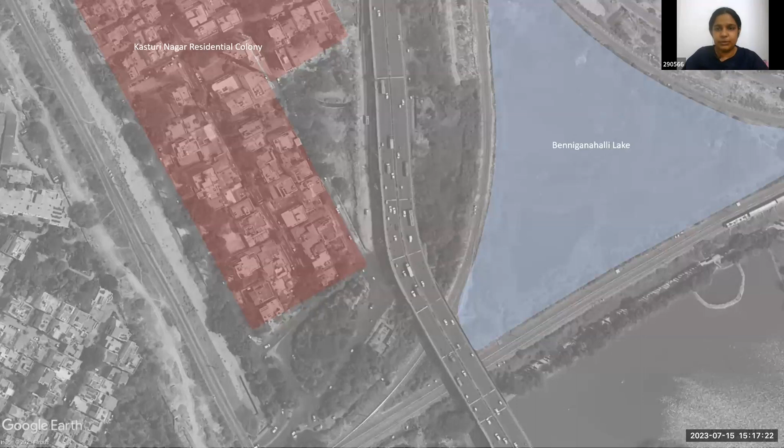Kasturi Nagar, an affluent residential neighborhood, landlocked between a flyover, multiple railway tracks, and a large lake.

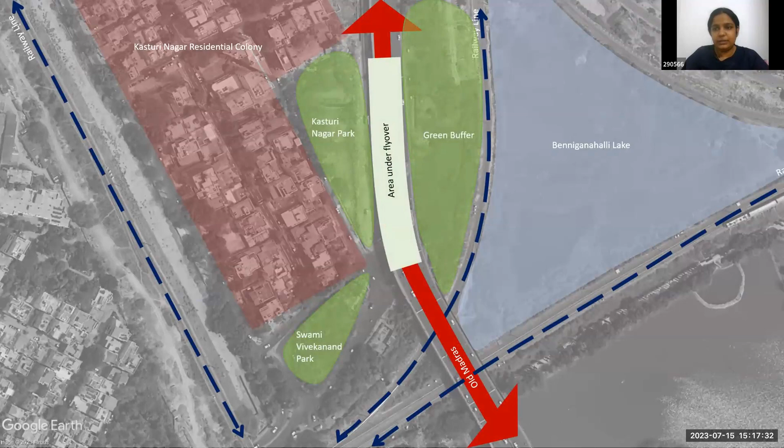It is surrounded by multiple open spaces lying dormant, like the Kasturi Nagar Park, the area under the flyover, a large green railway buffer, and Swami Vivekanand Park.

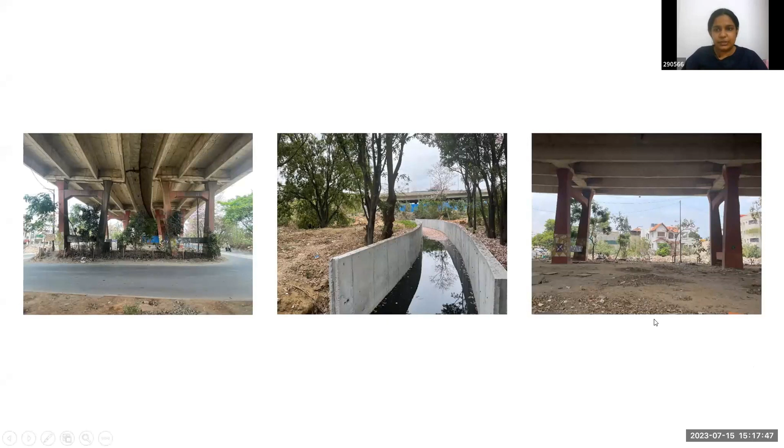However, despite so many open public spaces, there seems to be missing public life. This could be attributed to the spaces being unhygienic due to extensive garbage dumping, unsafe because of fast and disorderly traffic, missing crosswalks and footpaths, and lighting.

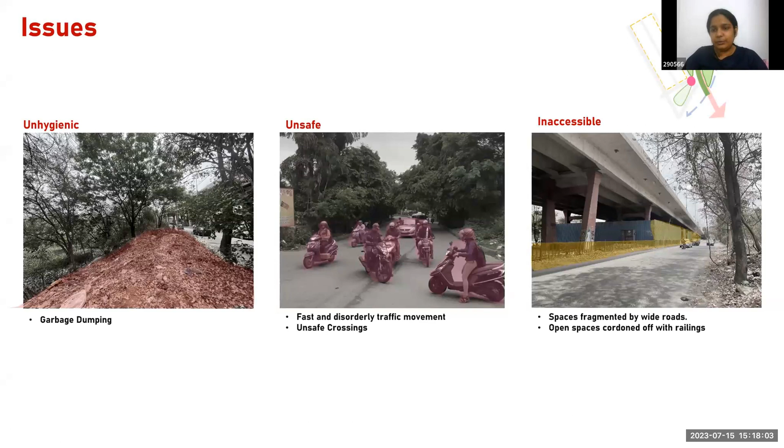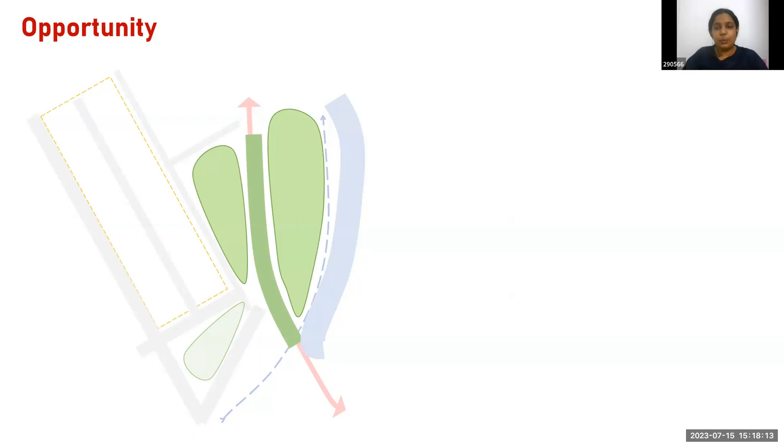These spaces are also inaccessible as they have been barricaded and due to the wild growth of plants along the edges. Yet, the site comprising Kasturi Nagar Park and the area surrounding it is brimming with the possibility of becoming one seamless large open space.

There is an opportunity to rethink and redesign the pedestrian movement for better connectivity. The abundance of natural wealth can be banked upon to create a sensory experience.

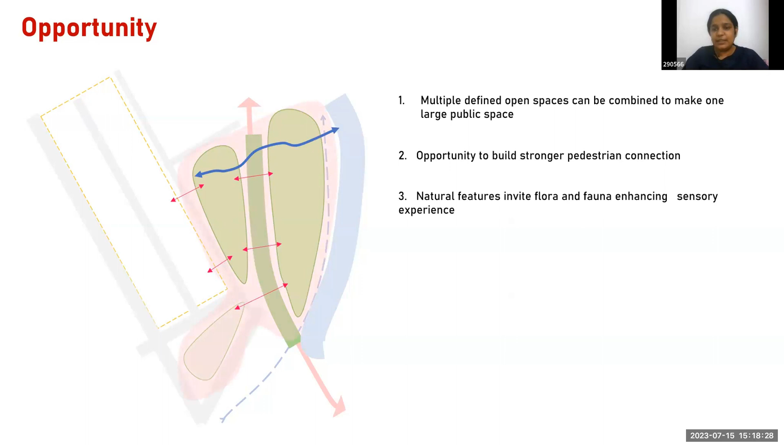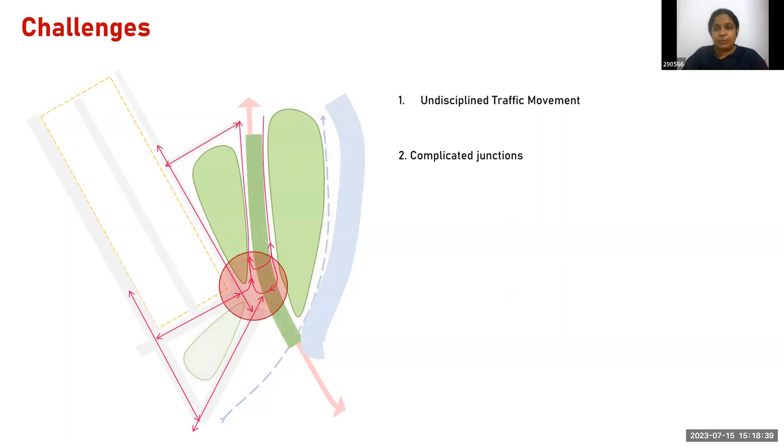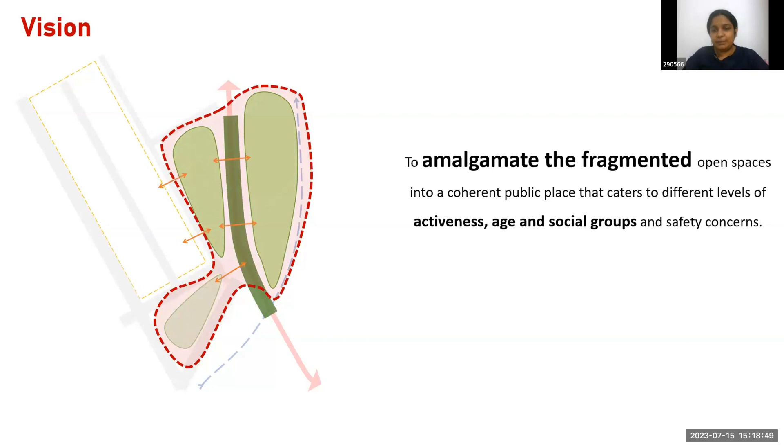Having the sites brimming with flora and fauna, however, harnessing these trends, redirecting the scattered movement of traffic and resolving the unsafe and complicated junction poses a challenge. Thus, the project Urban Rehash aims to amalgamate the fragmented open spaces into a coherent public place that caters to different levels of activeness, age, social groups, and safety concerns.

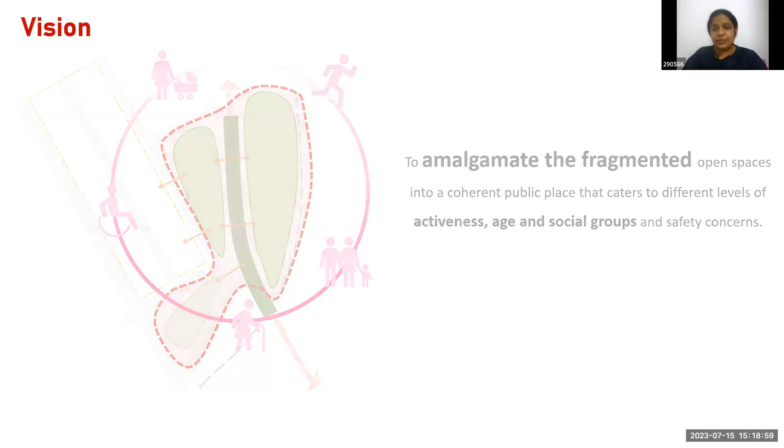To engage the diverse population and cater to their varied needs, the design identifies three larger zones. The Kasturi Nagar Park, imagined as the daily use leisure space for adjacent neighborhoods, caters to various age and social groups, and serves as a gateway for locals seeking relaxation.

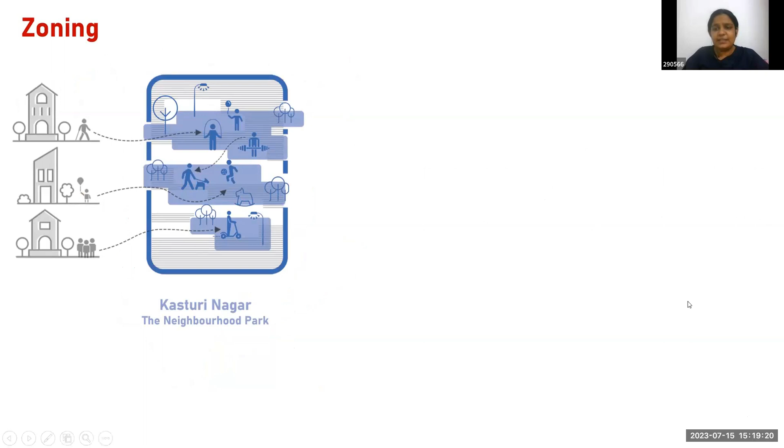The area under the flyover is designed as a district-level active public space to attract youth with opportunities to play, eat, and socialize in a safe and well-lit environment.

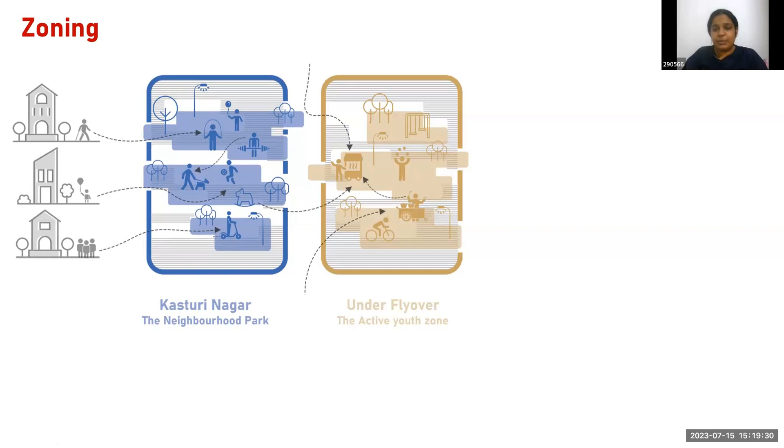And the lush green buffer will be the city-level public space, transformed into a picnic spot with lush greenery, cool breezes, and beautiful plants, birds, and insects benefiting from its proximity to the lake.

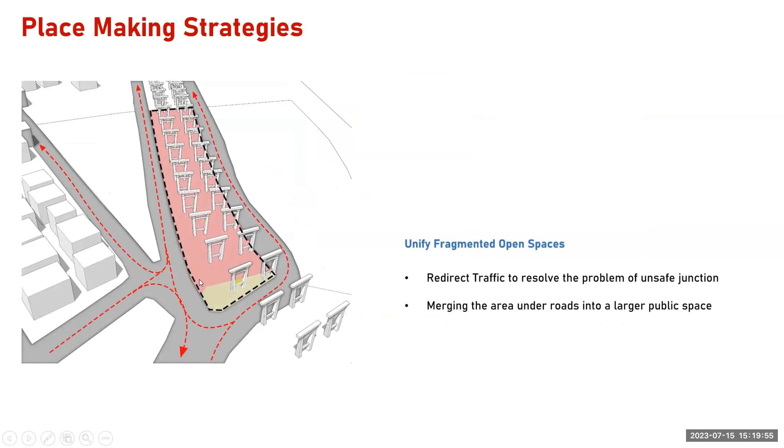Coming to the placemaking strategies, to resolve the problem of the unsafe junction here, the traffic is being rerouted so that we can provide a signal control junction here, while using this whole space as a single public space.

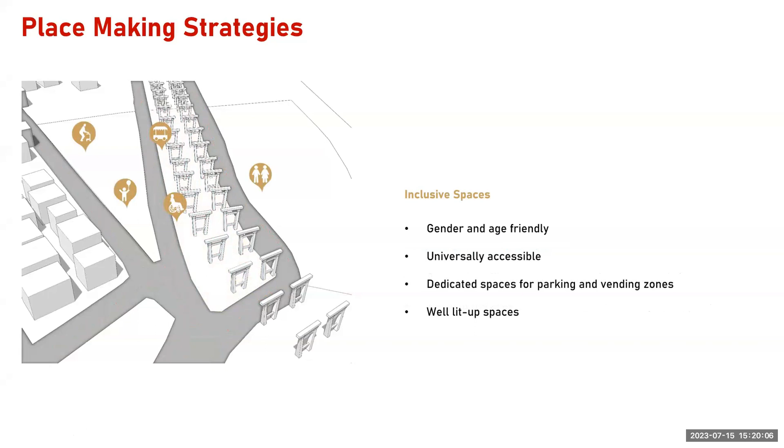The idea is also to give an inclusive design with respect to gender and age, universally accessible, with dedicated spaces for parking and vending zones, and well-lit up spaces.

Talking about safety, cobblestone paving and tabletop crossings are provided to reduce the speed of traffic, and adequate lighting, signages for orientation, and bulbouts at the junctions are provided for safety.

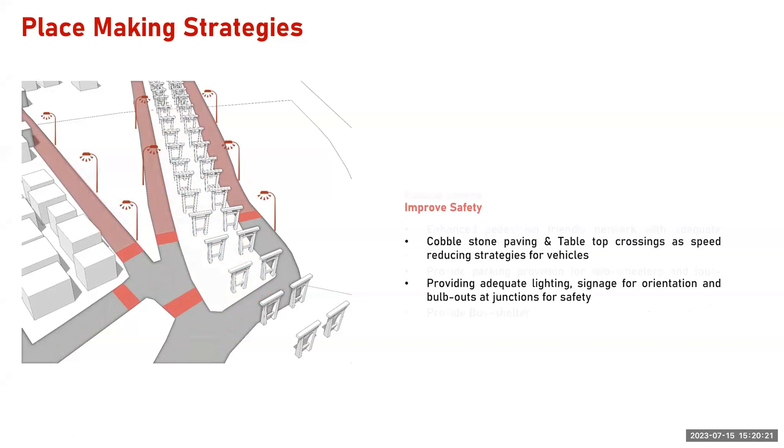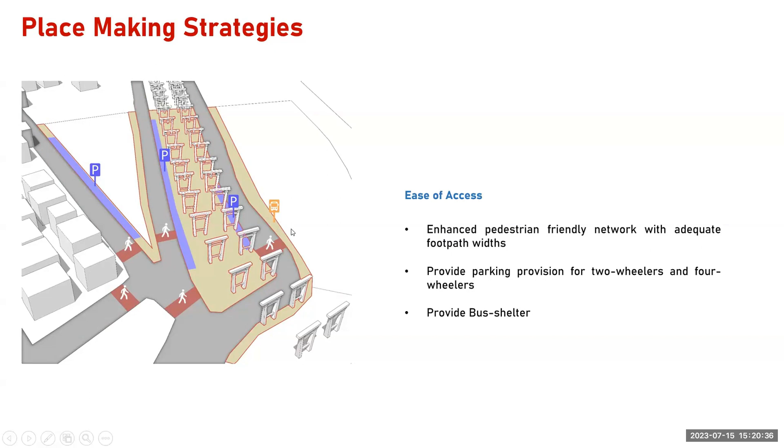For people coming by walk, these tabletop crossings along with adequate width footpaths are provided. For people coming by private vehicles, two-wheeler and four-wheeler parking pockets are provided. And for people coming by public transport, a bus shelter is provided here.

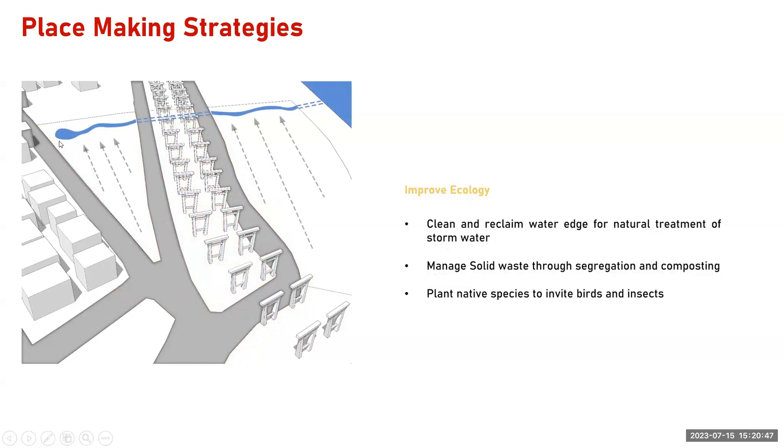Talking about the Nala, the idea is to integrate it into the public space design by naturalizing its edges and planting native species around it.

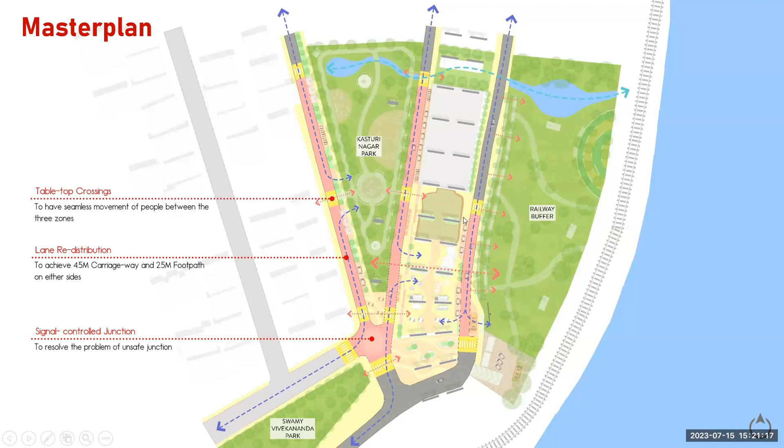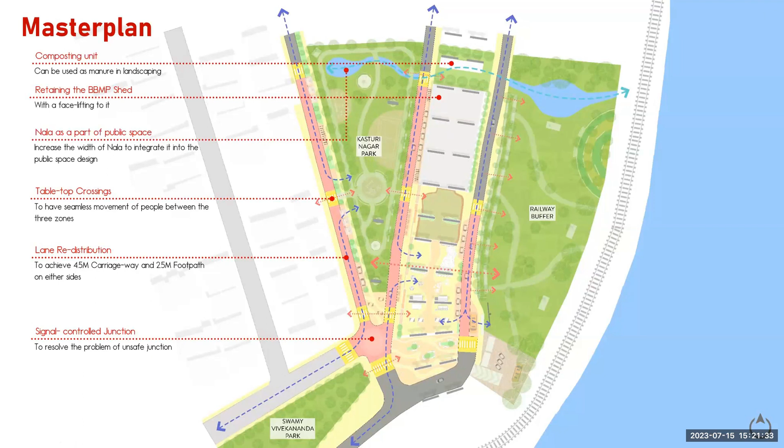The BBMP shed is being retained with a facelift, along with a composting unit proposed here. And the width of the Nala is being increased at a few places, making it a vibrant water body, integrating it into the public space.

Looking at Kasturi Nagar Park, from the visioning workshop it is understood that people there require a day-to-day recreational space. So this park is designed for such kinds of spaces like walking or jogging tracks, shaded seating spaces, and a kids play area.

It also includes an open gym, sports facilities like a badminton court, space for yoga or a laughter club, and a bio-swale with a kitchen garden around it.

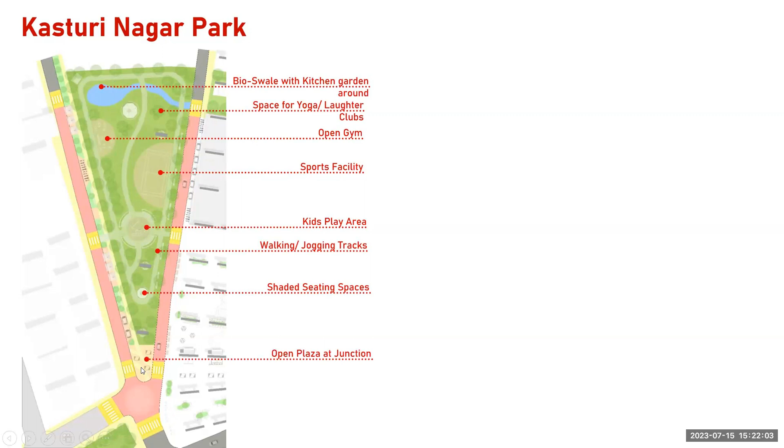A plaza space is provided near the junction. This is the kind of space in front of the park entrance where we have tabletop crossings and the vending zone, making it a welcoming feature.

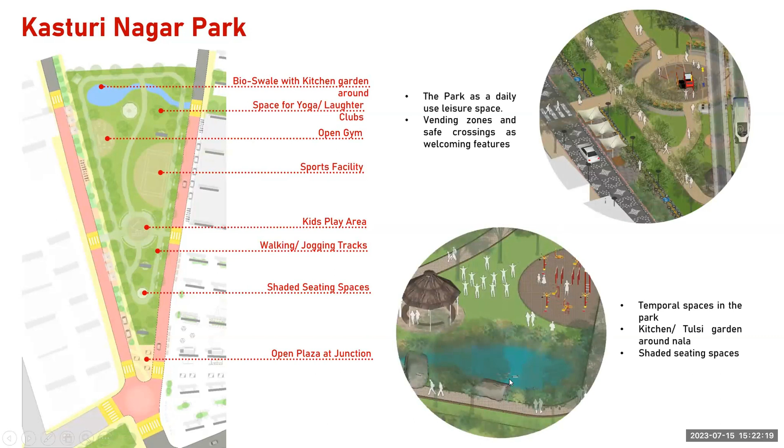Around this bio-swale, we can have kitchen garden kind of spaces where people can use it on a day-to-day basis. This is the character view near the junction, a signal control junction with tree seating spaces and easy connectivity to the surrounding areas as well.

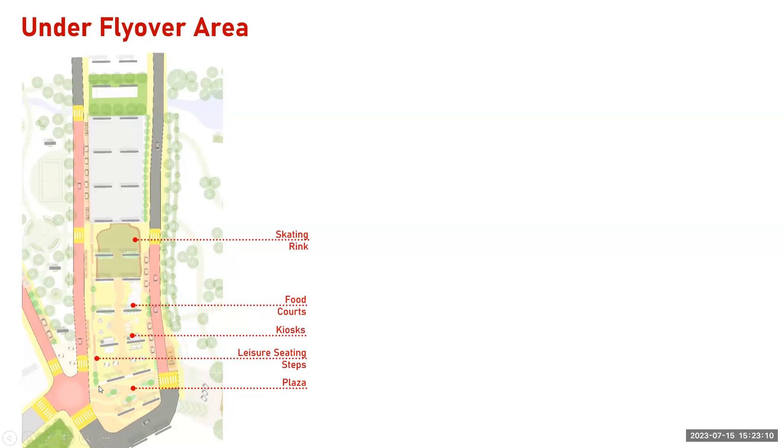Under the flyover area, since it has road access on both sides, this is mainly designed where people from the residents as well as people from a little far off areas can also use the space as a hangout space. Small kiosks and food courts are provided along with plaza kind of spaces, and sports facilities like a skating rink are also provided. The edges of the under flyover area are a little raised from the road level. Making use of that, leisure seating steps are provided where people can just enjoy the traffic with a cup of coffee. Parking spots are provided on either side of the road.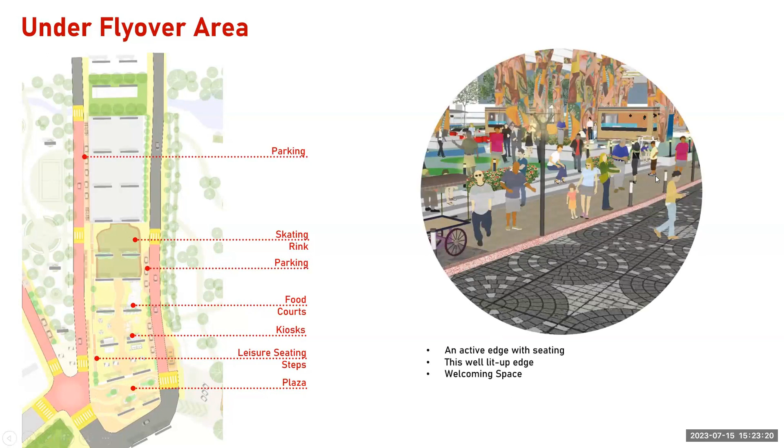This is the edge treatment wherein we can have vending zones, proper lighting facility, and seating steps around the edges. This is the character view inside the under flyover area where we have seating areas, built-in seating also, and the food court activities happening.

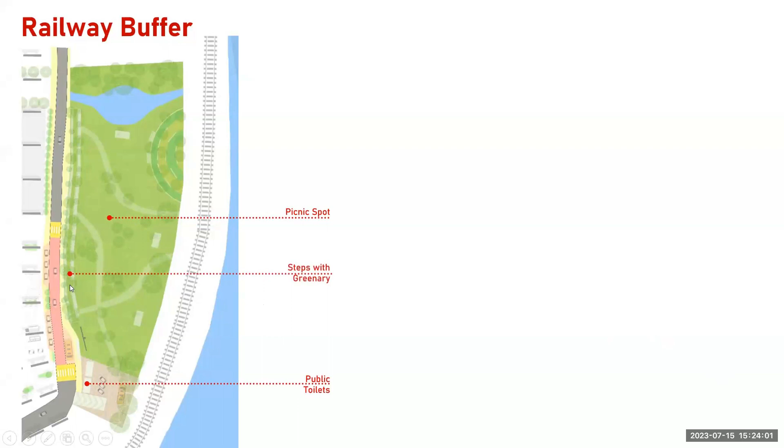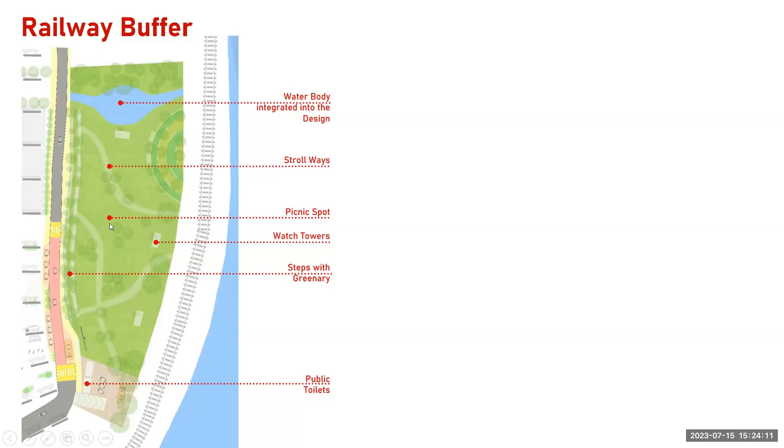For the railway buffer, since it comes under buffer area with minimal intervention, this is developed as a picnic spot or a community gathering space, or small events can be hosted in this space. Even vehicular access is provided inside, with all the basic facilities like public toilets or drinking water points. All along the edges, seating steps or greenery is integrated into it. The water body is also integrated into the design as an attraction, and watchtowers and strollways are provided within the green buffer.

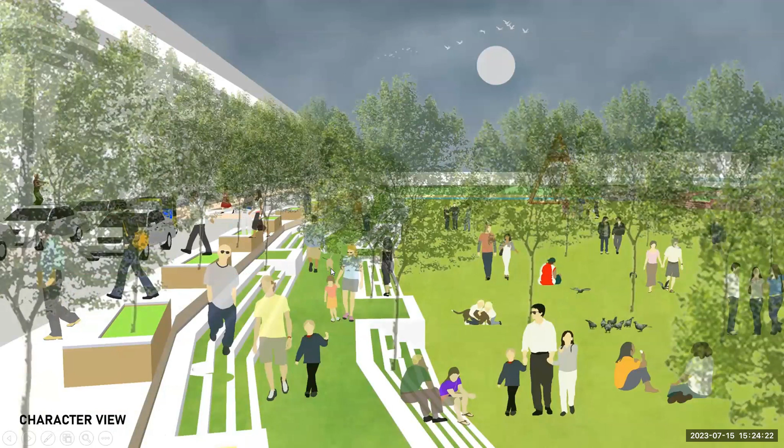The transformation is planned to be carried out in 5 phases, each improving the quality of public life. To start with, the area and its edges have to be cleaned of garbage and debris to improve visibility. Next, tactical interventions to bring behavioral change like rerouting traffic, painting crosswalks, junctions, parking spots and roads, and also generating revenue through paid parking.

This will feed into the next phase of developing Kasturi Nagar Park and its edges. Leasable vending spaces can be introduced to further help generate revenue for the next phase, that is the 4th phase of activating the under flyover area. These spaces can be earmarked for smaller gatherings and events apart from the daily life that will occur there.

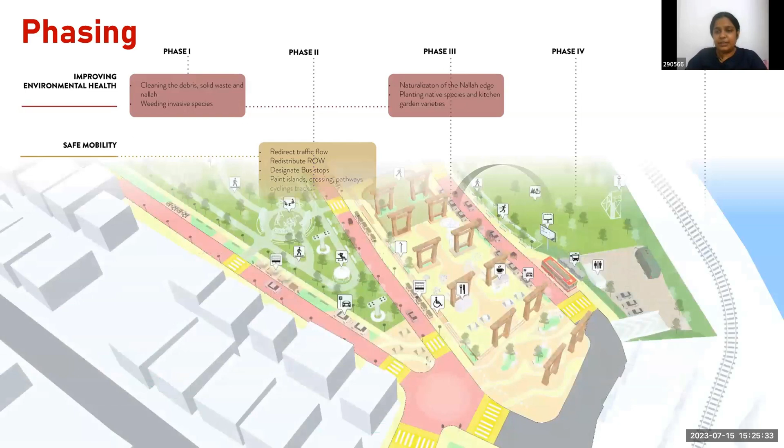Eventually, the green buffer will be transformed in the last leg of the project development. The revenue that continues to be generated can be channeled into the maintenance of these spaces over time. Thus, the urban rehash proposal rehashes the way we approach our public places, and through effective but minimally invasive interventions, transforms the Kasturi Nagar public spaces into a self-sustaining hub for social life, which looks like this.

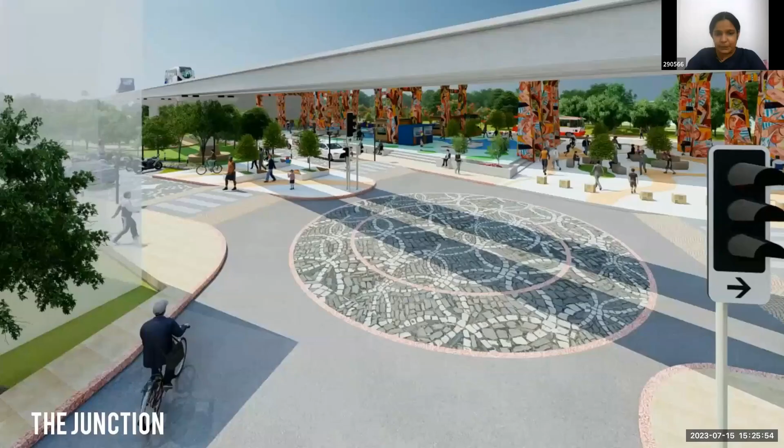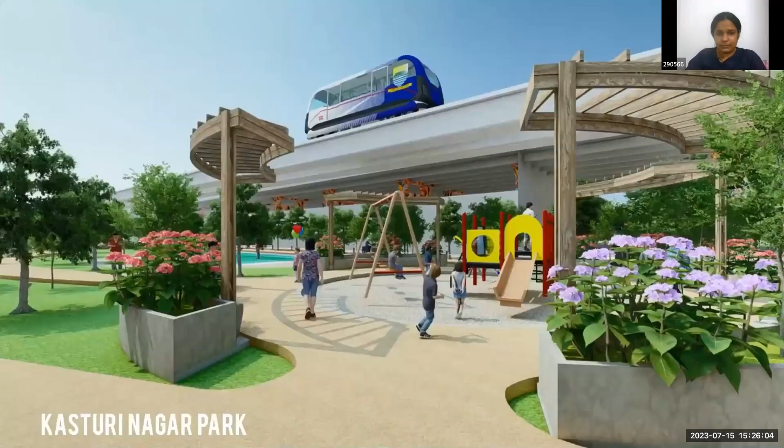In conclusion, the grounded design approach and temporal spaces bring Kasturi Nagar and its public spaces to life. Thank you.

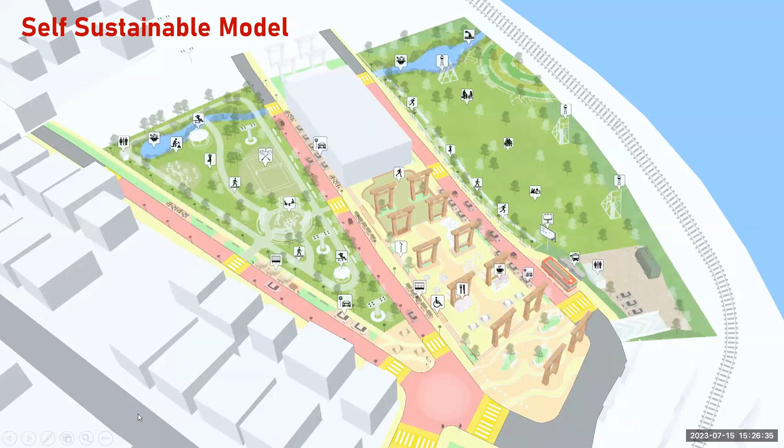So there is a large green space that has to be sustained. Have you considered the maintenance cost and factored it in? Since it's on either side of the flyover, there are huge parks, so the maintenance of these green spaces especially, and there is a lot of hardscaping as well as landscaping aspect included, which requires pruning and maintenance of the greens, which is a very big cost. So what have you thought about that, and also about watering these many greens?

Yes. Alekia, do you want to take this question or do I go ahead? Yeah, please go ahead.

Okay, so firstly, one of the important interventions for us was rejuvenating the water edge, because we wanted water to percolate into the ground. As it is so close to the lake, we are expecting the water levels to be high, so the larger trees can depend on groundwater. Secondly, for maintenance, that is why we introduced the idea of paid parking and leasing out the vending spaces, also adding billboards along the highway, so that these could help generate revenue, which could in turn be fueled into the maintenance of these parks over the long run, and help maintain the landscape as well as the hardscape.

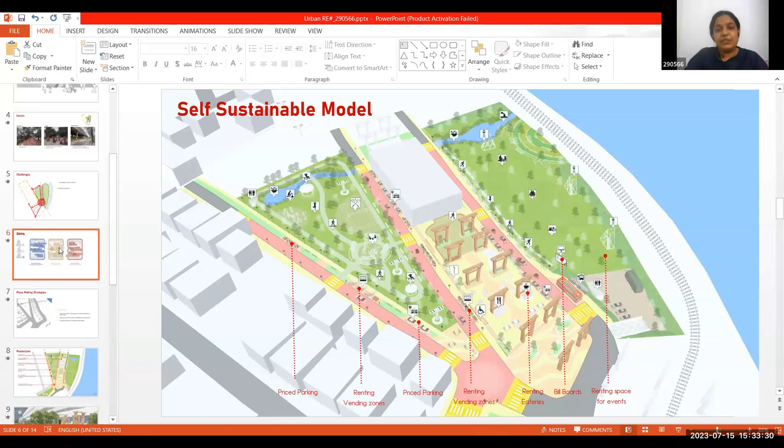And lastly, for the green buffer, one thing we've incorporated, as we imagined it to be accessed by a lot of people, was the intercity bus stop that would bring people in from all over the city. So we incorporated that at the edge of the green buffer, because we imagined that space to be used not just by immediate residents, but by people coming from afar as well. So connectivity was important, to improve not just immediate connectivity, but across the city. Secondly, it was important to have it as a large open space, which could be flexible enough to be used in any way people wanted. So yeah, I hope that answers it.

Yeah, it answered. I did not say you didn't have any of it. You have all of it. That's the problem.

Maybe it didn't come through clearly. If I consider this as my home on behalf of Kasturi Nagar residents, there is one level of privacy, then semi-private, and then public. So where does one stop and the other begin?

After some time we give this amazing vision, but it also becomes a problem when you can't stop people. Who are we to stop the public from using this? Right now we are doing it for two reasons: primarily the network at the larger level, as an urban designer, and also as a Kasturi Nagar resident. For me, the city is very important - the systems should not be broken, like the flyover, the metro, and under the flyover.

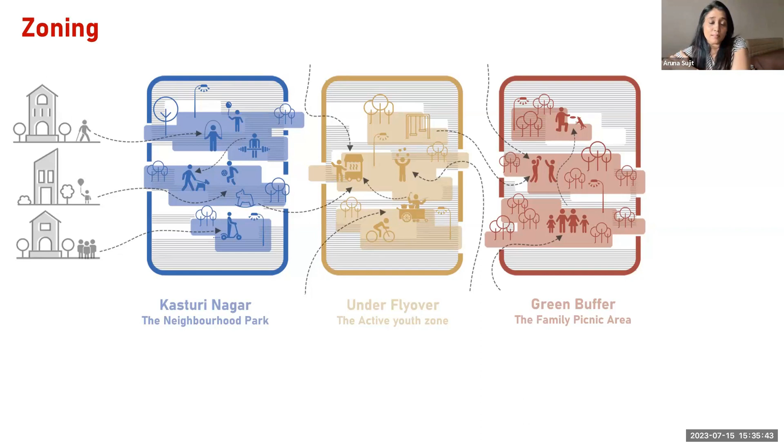The other reason is me being a part of Kasturi Nagar. After some time, what we provide should not become a nuisance to them at the end of the day - that's always a challenge, and I don't know how to fully deal with that. So that clarity exists already in terms of the activities, but I don't think it's coming across in the drawing. Okay, noted, thanks.

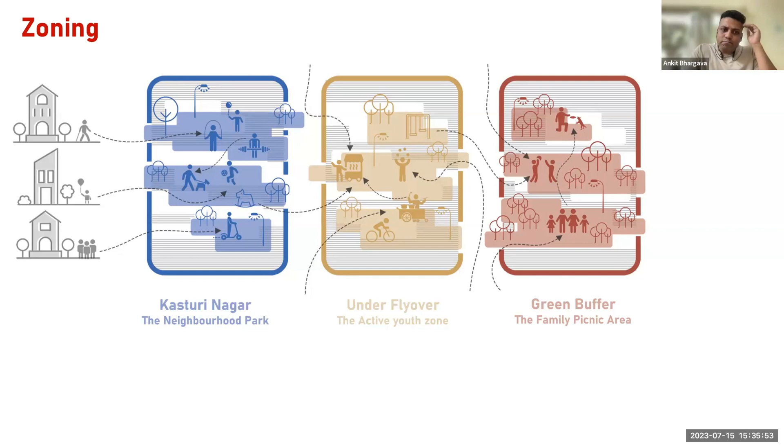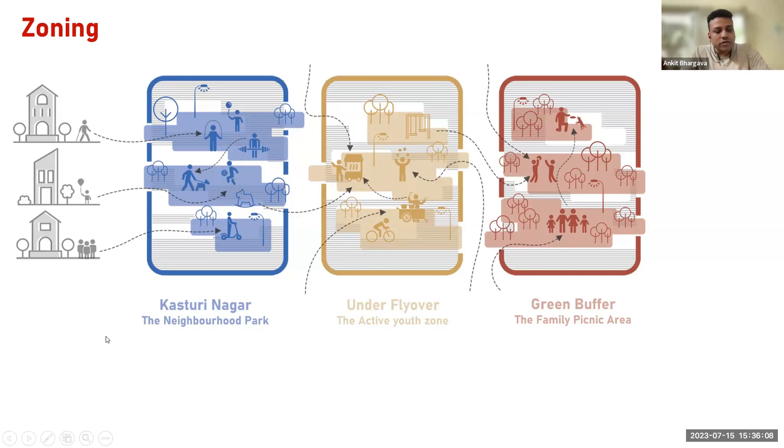I have a question - go ahead, Ankit. Okay, so some of the issues are mostly around dumping that is happening. If you look at the issues, number one was the garbage dumping and animal waste. How is your design responding to that issue? How are you solving for that?

Second, if you look at the Rajkaluve itself, it's actually full of sewage. How are you looking at solving that? Because you have to solve it by design. Right now it's pretty much sewage water, so just opening it up doesn't help.

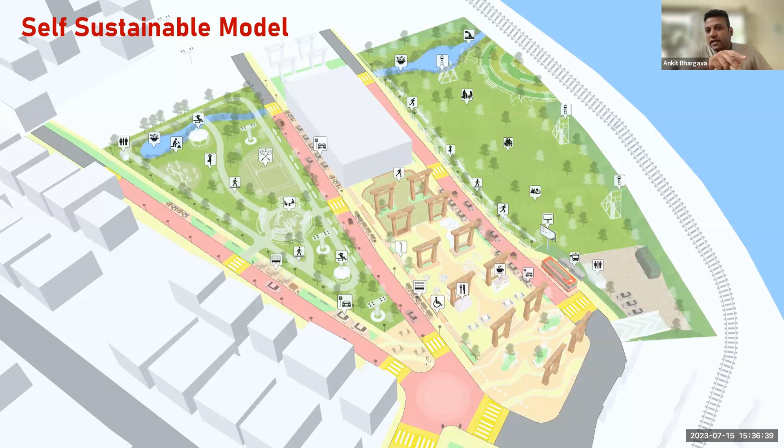Third question - you can answer them one after the other - I see that the edges, whether it's the water or the road meeting the park, are of concern, especially the tertiary road on the railway line side, which is still a thoroughfare with city and inter-neighborhood traffic happening there. You can't really touch the railway side, so I'd like to understand your ideas around treating these edges - the water in the park, the road in the park, the railway in the park - all these conditions, along with the first two questions.

So you can just answer them very quickly, 30 seconds. Just a moment - I would really request the jurors to keep it short, we only have 10 minutes for the question and answer session. I would also request, if there are overlapping questions, maybe we can move on to the next proposal. So guys, if you can respond very quickly, in under a minute. No long sentences, just 20 seconds, that's enough.

Sure. So firstly, for the water body, we are treating it naturally - there are plants that treat water naturally. Also, to avoid siltation, we hoped to use nature-based solutions again for treatment, using pebbles and such to stabilize the edge. For the cleaning and maintaining of waste, there's already a BBMP shed that segregates waste, and we've added a composting unit to manage organic waste. We believe that when there are more people out on the streets, nobody prefers to do anything socially unfavorable - that's the whole idea of opening up these spaces, so that unsocial activities are limited.

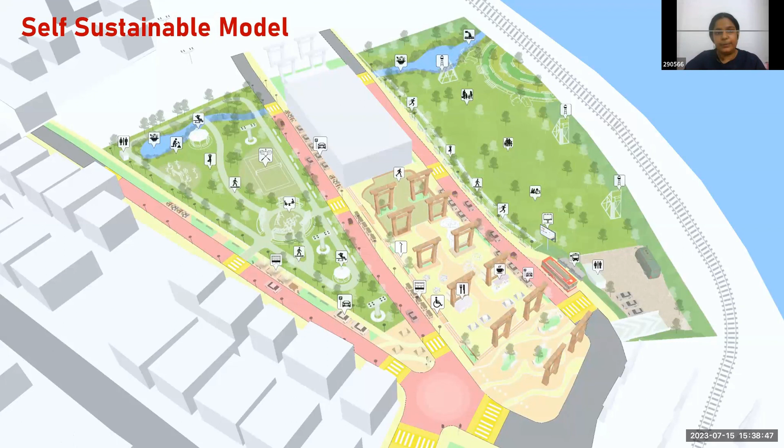The third question was about the edges, right? For us, like you said, it's a thoroughfare that goes through the city, so we do not want to disturb that. We just want to slow down the traffic enough that there is easy crossing. That's why we've used cobblestones and introduced crossings at regular intervals wherever needed. Okay, I'm fine, thanks. Thank you - we're out of time.